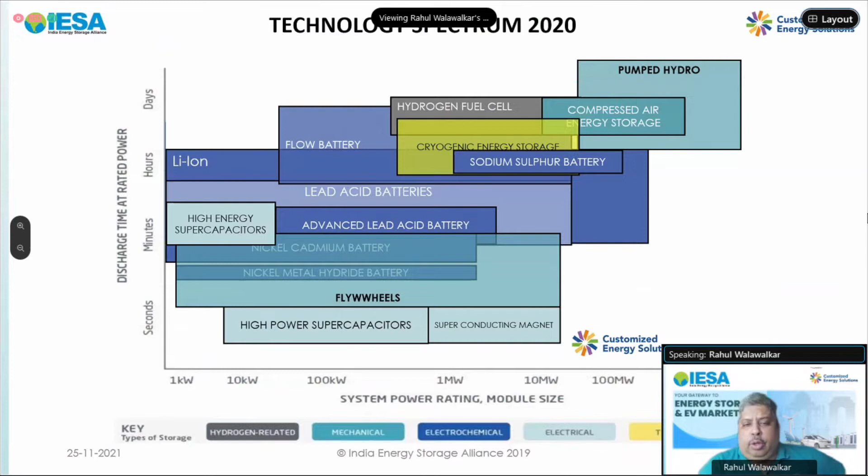So there is a healthy competition across all these technologies, and you need to not just focus on the power and energy or capital cost, which a lot of people get very fixated on. When you are selecting technologies for the right application, there is a range of other parameters such as energy density, power density, thermal safety, round trip efficiency, capital cost, complexity of the management or the controllability of the storage device, the cycle life, which determines ultimately how long you have before you have to replace the technology, and certain aspects such as self-discharge. So these are 7, 8 parameters, and there are many more.

So depending on your applications, you may replace some of these parameters with other parameters, and no one technology is going to be able to perform ideally on all parameters. But it doesn't matter, because for different applications, not all parameters are very important. And that's where it is exciting, where we feel that it's not that the entire market is going to be dominated by just one single technology. We think there are enough opportunities for multiple technologies to play a key role and prosper together.

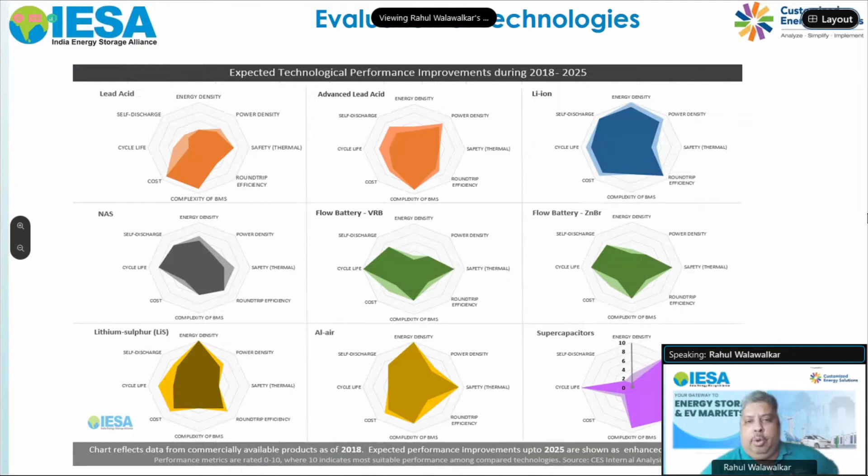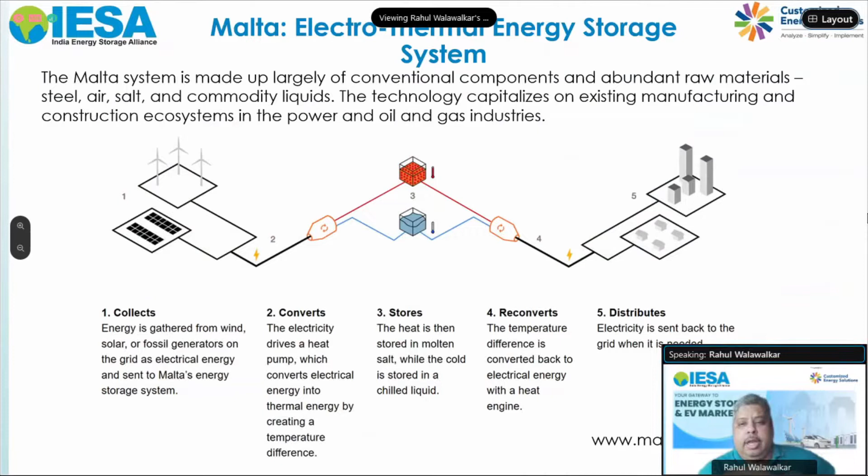Now, coming to alternative technologies, here is one form, which you can call a thermal battery, where you are using excess electricity to convert electricity into heat using a heat pump. And you can store it in a different medium where you can store both hot and coldness. And then you use it for reconverting it back with a heat engine for electricity when you want. So instead of converting electricity in an electrochemical process, you are storing it in a thermal process and then reusing it for generating electricity.

Another approach which is being taken, which builds on the fundamentals of the pumped hydro system, is called gravity storage, where you are stacking cylinders, as in the case of Energy Vault, where you have a crane which is building big towers with various concrete blocks, and you can move the concrete blocks up and down to either store the energy or release the energy.

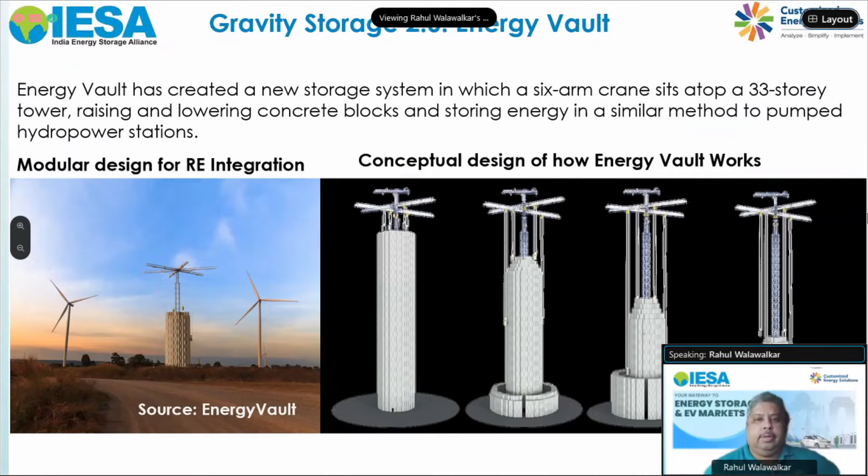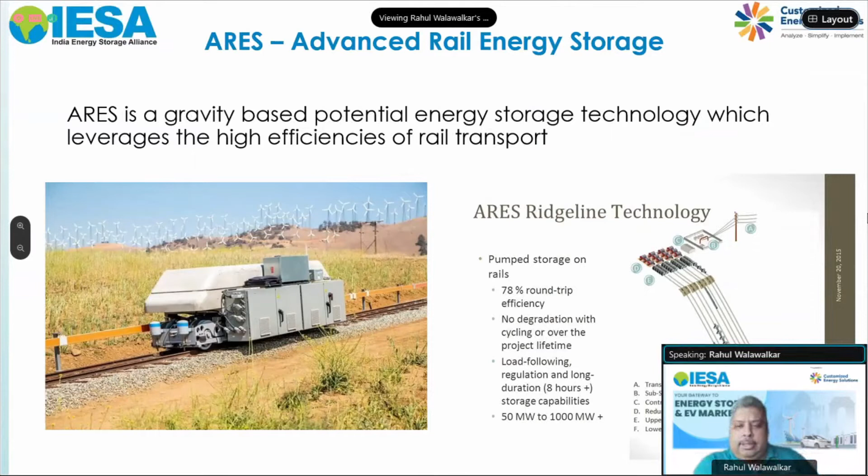There are similar approaches being tried in the US in the form of using rail or a pulley mechanism on a cliff, where you can use similar concepts by moving these concrete blocks up and down using rail technology. So a lot of these approaches are still in early commercialization stage. So we have to wait and see which approaches will succeed. But it's not only for these technologies.

In terms of pumped hydro technologies, the traditional challenge for pumped hydro is to find two geographical locations, one up high on the mountain and one on the ground level, where you need to have both storage facilities of sufficient quantity. But people have looked at using underground pumped hydro, particularly using old mines, where typically metal mines are ideally suited. Some people are even looking at coal or other mines, although I have some concerns, because of contamination or other aspects you need to be very, very careful about.

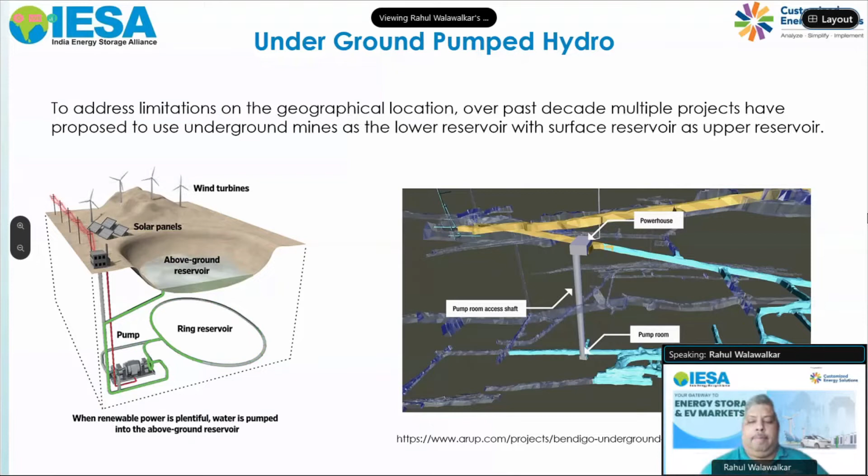But if these are metal mines, then typically those can be very well sealed and there may be fewer issues related to water contamination or other aspects. These are approaches which are being tried, and we'll see if this technology can supplement the traditional pumped hydro technology. There are other forms where, rather than using mines, you can use shafts and you can use weights and or pistons.

And again, I won't get into detail because Robin, I'm sure, will have probably much more information and more accurate information than the graphics I'm using to show. But I just wanted to educate and highlight that there is not just one approach or one technology available.

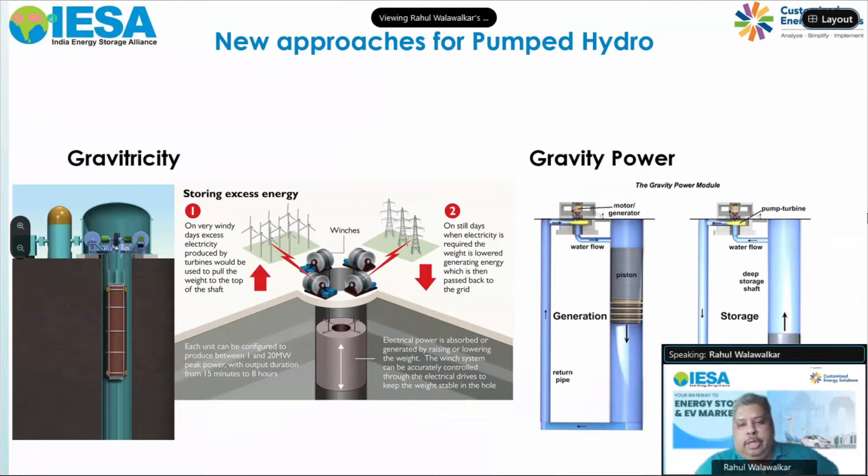I think there are lots of bright minds who are working on a range of technologies which can all meet the challenges which are being generated by our desire to decarbonize the grid, decarbonize the industrial sector. And without energy storage, I think we are not going to get the kind of flexibility we need. So this is really an exciting time.

Now, in terms of looking at energy storage and renewables, one clear aspect is balancing renewables. But this is an area where sometimes I think renewable developers themselves, in a short-sightedness, tried to downplay the importance or need of storage, because for the last decade there was sort of a race to the bottom in terms of looking for the lowest cost renewable energy. And again, when renewable energy was less than 5% or even less than 10% of the grid mix, it did not matter as much.

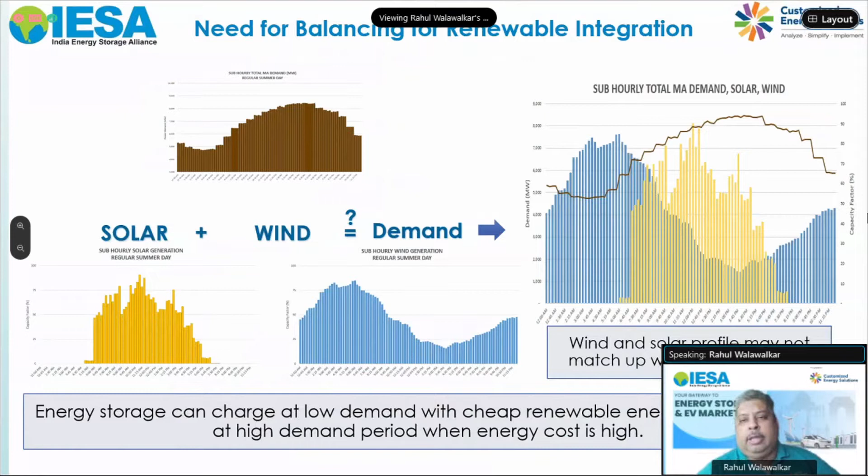But practically, when you're looking at managing the grid on a second by second basis or even 10-minute, 15-minute blocks, you start seeing that there are certain times, particularly morning hours, where both wind and solar will be available. Whereas in the evening time, where typically most grids face the highest peak load, neither sun nor enough wind is available. So just adding wind and solar is not going to allow us to run the world with net zero energy.

Now, the solution many people think is, oh, but we already have all these existing thermal assets. So why don't we just use thermal assets wherever wind or sun is not available? And technically, they are absolutely right. You can very well do that. But then the question is, why are we adding all these renewables? If the goal is the environmental goal and not just looking at the cheapest energy source, then mixing renewables and thermal makes no sense.

And there are many studies which have been done over the last decade around the globe which show that, especially if you are trying to rely on coal, maybe gas is a better solution. But unfortunately, in places like India, gas is almost non-existent. So you are looking at mainly thermal power in terms of coal energy for balancing renewables.

And that makes no sense because when you're operating these thermal assets in a part load condition, particularly going below 50% PLF, you start getting a situation where you lose a significant amount in terms of SOx and NOx emissions. And especially in India, where some of the particulate emission control and other mechanisms are not yet enforced, I think we are getting into a nightmarish situation where India already has the distinction of hosting 19 out of the 20 most polluted cities.

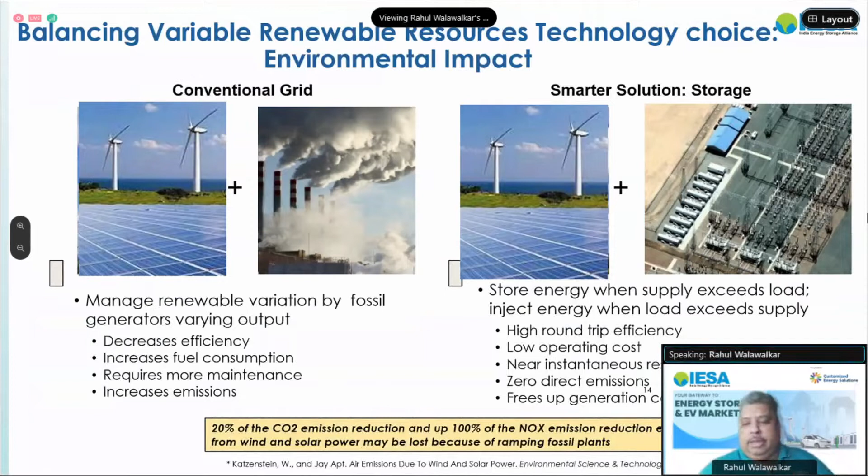So we cannot afford to rely on these thermal assets for this. And a better solution is already available in terms of integrating storage with these renewables, where you can have higher round trip efficiency, you can have much lower operating cost, and the levelized cost of renewables plus storage is coming down so rapidly that it can easily displace any peaker unit, but possibly even intermediate and baseload units in the coming decade. So here are some of the price data for storage.

And one thing people need to realize is that it is not just one parameter. You are not just looking for the cheapest energy storage technology, but there are many parameters such as your charge discharge rate, round trip efficiency, the cycle life, depth of discharge. All those parameters are important to estimate the levelized cost of such a renewable plus storage system. But one thing which is undeniable and very clear is that the cost is coming down, and it is already becoming a very good option especially for commercial and industrial customers who are paying much higher tariffs, especially in India, as compared to some of the other segments.

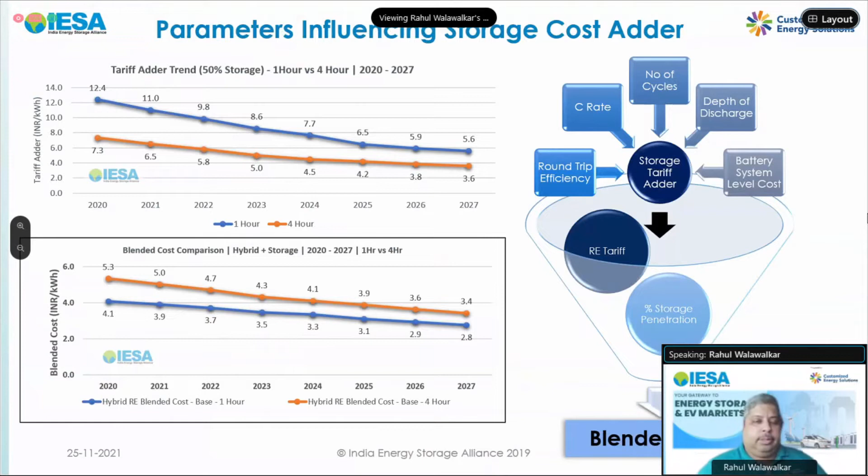So we as CES have been working on these types of projects for more than a decade now. We have worked on more than 200 projects on sizing storage and renewables. Using that, we have developed this platform called Comets, which can be used for evaluating which technology to use, how to size the technology, how to plan for any replacements if required, or how to evaluate two different technologies where one may have, say, 25 or 30 years of life, as in the case of pumped hydro or other mechanical systems, and another with 5 or 7 year life with multiple replacement cycles. So these types of tools can be used to make sure that you make the right investment decision.

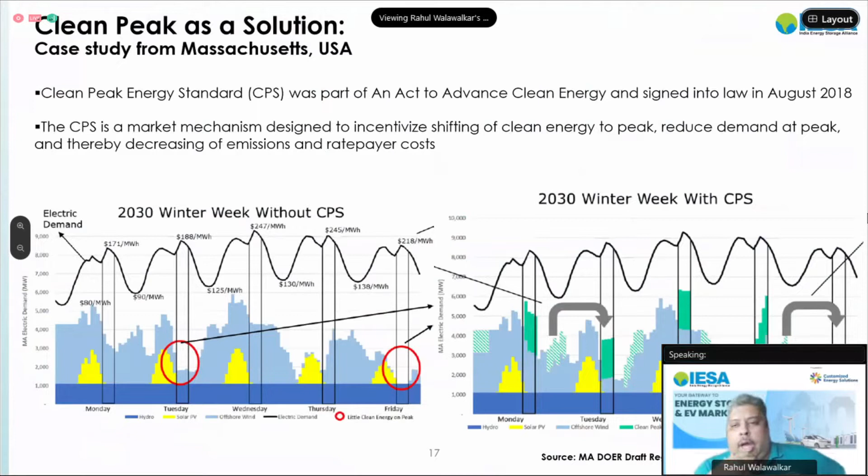The other area where storage is now being seen as an important asset is for cleaning up the peak. This is work which we did for the state of Massachusetts in the US, where we did a system level analysis and demonstrated that with more renewables coming in, the overall grid is getting cleaner. But still, because of reliance on traditional fossil fuel resources, the peak period was the dirtiest period. Based on that, a clean peak standard was passed, creating incentives for using storage and other technologies to reduce the carbon intensity and emissions during the peak time period. So those types of approaches also need to be tried. And especially if you're looking at a 4 to 6 hour peak, then RE plus storage is already a great solution.

Now, there has been a lot of policy work happening over the years in this area. As I mentioned earlier, IESA was launched in 2012. Since then, we have been part of various government committees, and we have been pushing for step-by-step improvements in removing barriers and enabling markets. So in India, hybrid projects are already considered renewable projects. There is an RE plus storage hybrid policy already released by MNRE, and it is approved by the Central Electricity Regulatory Commission. Such hybrid projects can be done as greenfield projects, or you can look at an existing wind or solar project, add storage and make it a hybrid project.

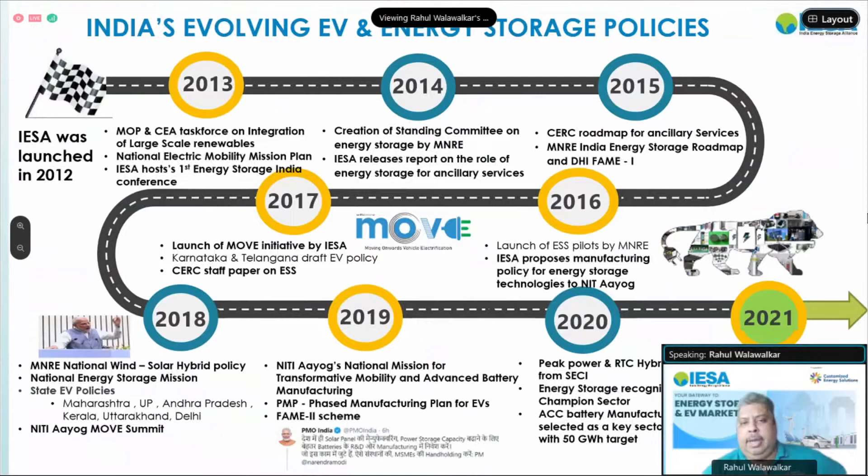We have a National Energy Storage Mission, which has been drafted by MNRE, and that is now integrated with the National Mission for Transformative Mobility by NITI Aayog. Together it has created a huge opportunity for setting up manufacturing in India. Over the last year, the Ministry of New and Renewable Energy and NITI Aayog have also been working on the National Hydrogen Mission. And we feel that green hydrogen will actually create more opportunities for deployment of both renewables and storage, rather than being a competition with existing storage technologies.

So overall, even without considering some of the recent announcements made at COP26, these are the results from our annual report. I am showing here market projections from last year's report, where as a base case, we are considering somewhere around 400 to 500 gigawatt hours of energy storage deployment across stationary and e-mobility.

And in a best case scenario, this demand can be more than 700 gigawatt hour between 2020 to 2027. And we are right now updating this and coming up with a scenario for going through 2030. But if anyone is interested in these reports, you can drop me a mail separately, and I'll be happy to connect you with my colleagues who have authored these reports.

I mentioned earlier that one of the reasons why the prices are coming down is also the scaling up of manufacturing. And this is the area where IESA since 2016 has been working on creating a policy framework for enabling advanced manufacturing in India. And as part of that, already there is a mission launched for battery technologies, but we hope that in the coming years, other technologies, if they decide to set up manufacturing in India, we as IESA as well as many government agencies will be willing to support those technologies as well.

But for batteries, already there is a 50 gigawatt hour battery manufacturing mission, which is announced, where the cabinet approval came in May earlier this year. By October, the actual RFP was released, and the current deadline for submitting the bids is end of December, but it may get extended by a month based on some of the requests from many of the leading companies. But by March, this selection process should be over. And between June 22 to June 24, these gigafactories will start getting constructed.

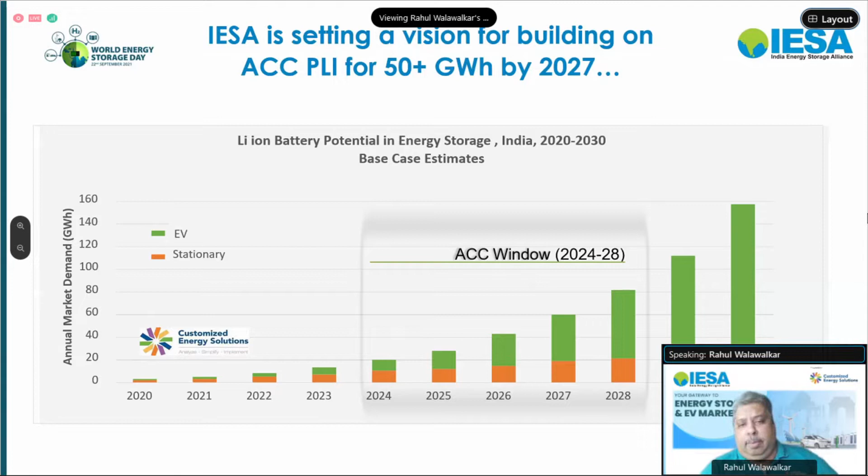So we want to make sure that we don't just stop at building 50 gigawatt hour of battery technologies, but look at all forms of technologies and support those technologies to get to more than 100 gigawatt hour manufacturing by 2030. And we want to continue to build on that to get to 500 gigawatt hour manufacturing capability by 2035.

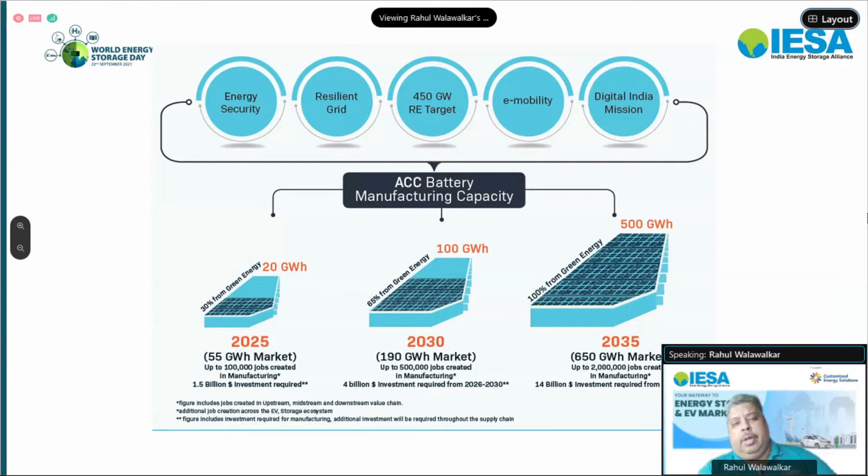We are looking at supporting various startups already under IESA. We have more than 25 startup members, and we have partnerships with many government ministries as well as other private incubators where we are together supporting it. Next year in February, we are launching an accelerator program where we ourselves will be taking an active role in grooming some of the next generation startups.

We are also addressing the skill development gap related to this emerging area, because right now the kind of interest and opportunities which are coming up, it is not matched by the skill development. Many of the existing universities and programs are not capable, or they are not right now equipped for providing the right kind of training for this. So we are looking at partnering with many other associations or even academic institutions for addressing that skill gap.

We also have created our own magazine, Emerging Technology News, for creating awareness. There are various knowledge papers which are released throughout the year. There is a podcast available for free for people who want to stay informed about these opportunities. And there are also commercial reports available in terms of either market overview reports or technology assessment reports, which can be purchased or which can be included with a higher level membership of IESA.

So to conclude, I would say that over the last 5 years, the energy storage and e-mobility policies have evolved quite rapidly in India. Overall, the energy storage sector has shown a similar learning curve for cost reduction as exhibited by the solar industry. There are a range of technologies where performance improvement is happening, cost reduction is happening, and traditional pumped hydro, although it is proven, is limited because of various environmental or geographical limitations. So we need to look beyond just the traditional approaches.

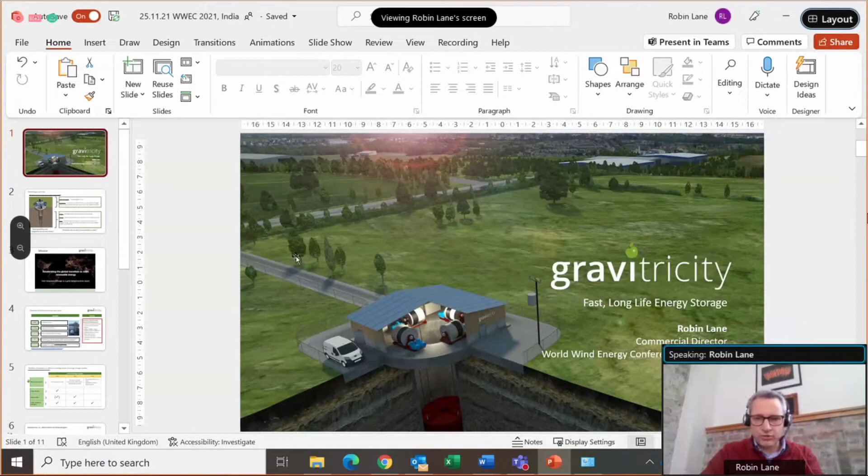Thank you, Rahul. And let's see if we can... Can you see that? For some reason I've gone mute. Can anybody hear me? Rahul, I can't hear you. Can you see that? Rahul, I can see you talking, but I can't hear you. Sorry, I think the organizers were muting me, or we were trying to unmute simultaneously, I guess. Okay. We can see the screen and we can hear you well. So you can see the screen.

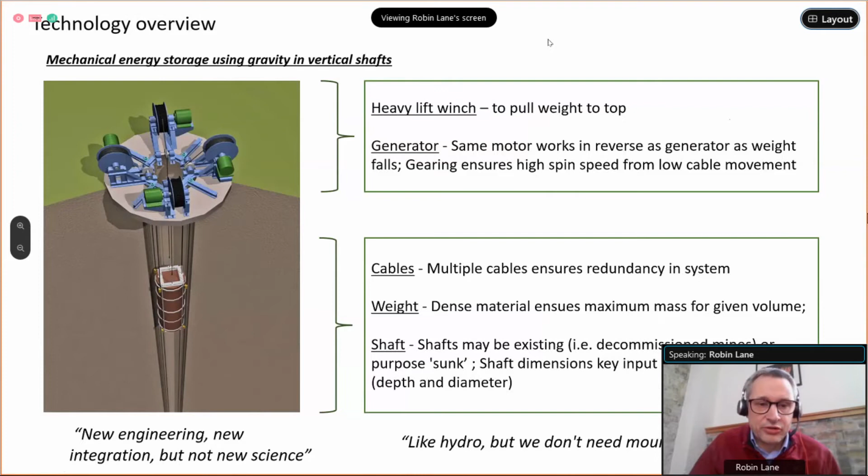In terms of our mission as a company, we see a world of distributed generation requiring a world of distributed storage, and it's very much facilitating the distribution of that storage around the world. The democratization of energy and the low carbon transition. These are all things which are very dear to us as a team, and it is very much a global thing. We're a company based in Scotland, but we feel we have a technology which has applicability in different parts of the world, in the developing world, in the developed world, and in all sorts of different use cases, which we'll get to in a minute. So it's very much a global mission that we have.

But on the equity side, we've raised quite a lot of money as well. We've filed 7 patents in all, and 4 of those have been granted, and 3 of them are still pending, and we're currently looking at filing them elsewhere in the world as well, in different jurisdictions, including India.

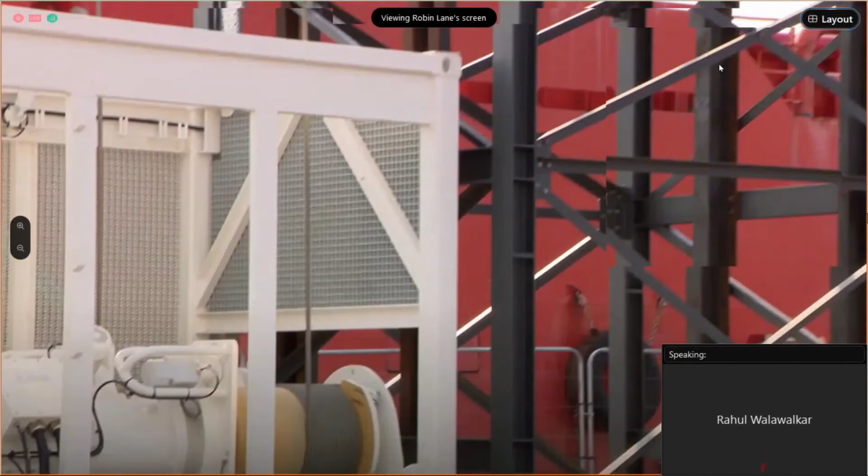Yeah, so there you've got 2 weights going down at the same time. It was quite a modest height. It was only 15 meters high. And so that facility was actually up earlier in the year doing the testing, and we actually wanted to keep it up for the purposes of the recent COP event, which happened just down the road in Glasgow, which is about 30-40 miles away. And we did want to relocate this system to Glasgow, but that didn't prove possible in the end, which was a bit of a shame.

In terms of looking forward, we are looking between 2021 and 2024 to develop our first full-scale deployment, and we're looking at potential sites in Eastern Europe for that, potentially in the Czech Republic or Poland. That will be a 4 megawatt, 1 megawatt hour system, so a relatively short duration system, which will be deployed to provide balancing services and ancillary services to the local grid.

And a key priority for us over the course of 2022 is to raise a second tranche of Series A funding of between 6 and 10 million pounds. So people talk a lot about energy storage and the way the requirements of the market are going to evolve over time. And we have our own perspective on this.

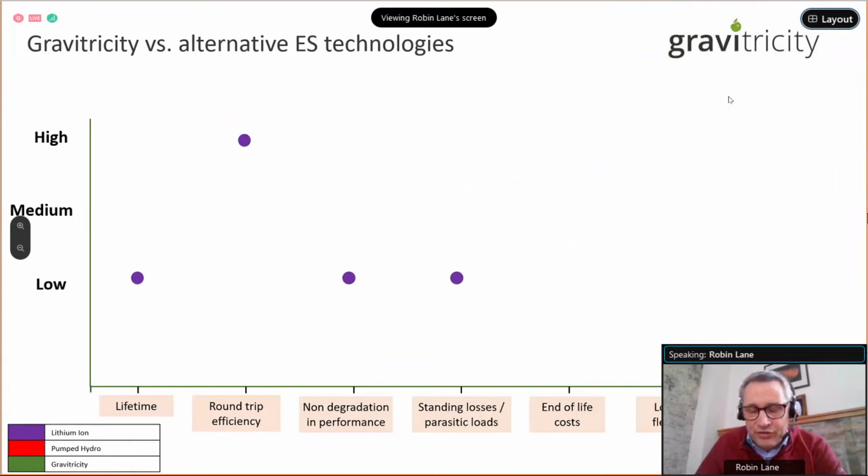It's also not very good on parasitic loads. It requires an air conditioning system to keep it from catching fire often, and so that's obviously a drain on the charge of the system as well. And the other thing that people don't really talk about with lithium ion is the end of life costs. It's sort of an unspoken subject, we feel, on lithium ion,

but it is going to present a problem, and the decommissioning and the challenge of disposing of the technology in an environmentally responsible way is going to create a different category of costs, and that's something which we feel there's not a lot of awareness of right now, but it's going to carry on increasing in importance. They obviously do very well in terms of location flexibility. It's a highly flexible system. It can be located anywhere, and it's also very good on speed of response.

So that's lithium ion. We go through the same thing with pumped hydro. It obviously does very well on lifetime. The components can carry on being replaced, and there's no sort of obvious end of life for them. It doesn't do so well on round trip efficiency. It's sort of 65, 70%, so not nearly as good as lithium ion. And on non-degradation in performance, again, it's very high on that.

Its standing loss is very good. That water can stand at the top of the reservoir or up the mountain as long as you like, and it won't lose any of the potential energy it's got there. And its end of life cost is very good. It falls down a lot on flexibility of location, because you do need certain geographical characteristics to make it work, and it's not so good on speed of response as well. So you can see how pumped hydro and lithium ion are in many respects sort of diametrically opposite. They perform in completely different ways and have different performance characteristics.

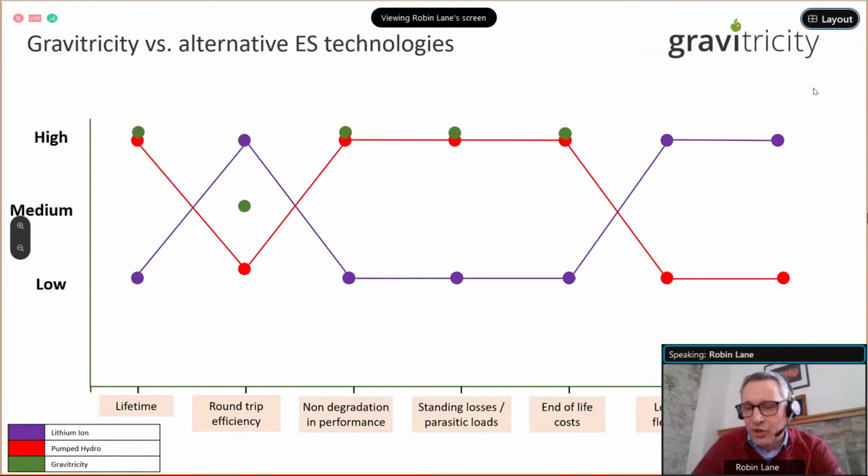Not so good on location flexibility. The nuance there is that when we're looking to locate one of these systems in an existing shaft, we obviously have to go where there is an existing shaft, but where we're looking to locate in a new shaft, we do have a greater level of flexibility. And as I said, we can respond to grid signals in under a second, so we do well on that. So we like to think that we do have characteristics that draw upon some of the best areas of lithium ion and also of pumped hydro.

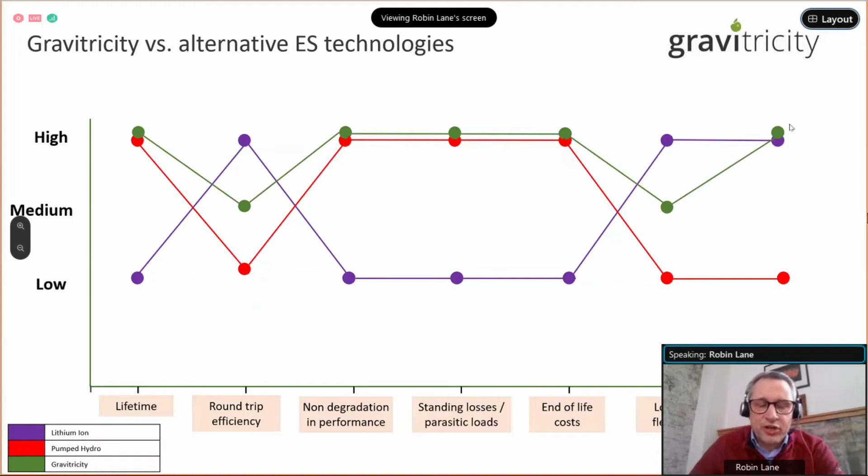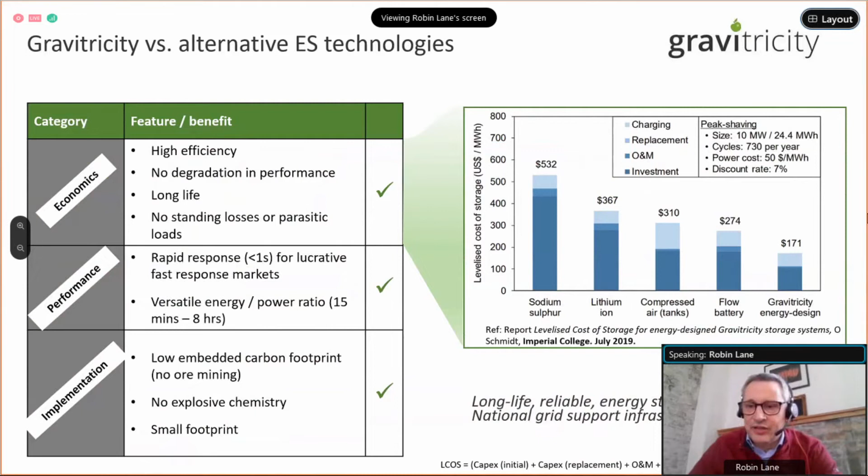And what that equates to, I won't go into the slide in much detail. The stuff on the left is kind of what we've gone through already. But just to say that the graph on the right is a screenshot from one of the reports I mentioned earlier, which demonstrates that our levelized cost of storage over a 25-year period is significantly lower than any of the other technologies that were profiled as part of this study.

We see ourselves operating in 4 different use cases. Balancing service is the one I've alluded to first, and we expect that our initial deployments will be offering ancillary services, grid services, fast frequency response services to the grid. But we see ourselves doing much more than that, and we also see a lot of value for co-locating our facilities with solar.

Supporting industrial decarbonisation, so think large off-grid industrial operations which are looking to wean themselves off their diesel gensets. They could be mines, and there's obviously a fit with what we're looking to do if they do happen to be mine operations, but they don't have to be. They could be any sort of off-grid operations. And fourthly, and very importantly for us, is the combining of our system with mini grids to provide or help to provide more 24/7 power services to remote communities.

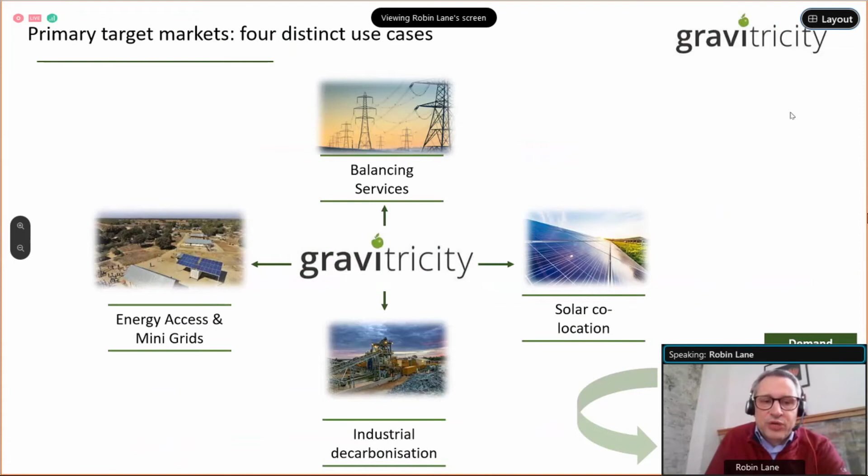I won't spend long on this slide, and we don't need to cover off all the text on the left or on the right, but just to say that we see ourselves as a technology provider to the EPC. So we're down the bottom there. We don't see ourselves as a project developer or getting involved to that extent in particular energy storage projects. We see ourselves as performing a technology provision service to the EPC who's being hired to actually build out the facility. And so we would provide IP licenses, hardware and equipment, and perhaps an O&M contract as well as part of that.

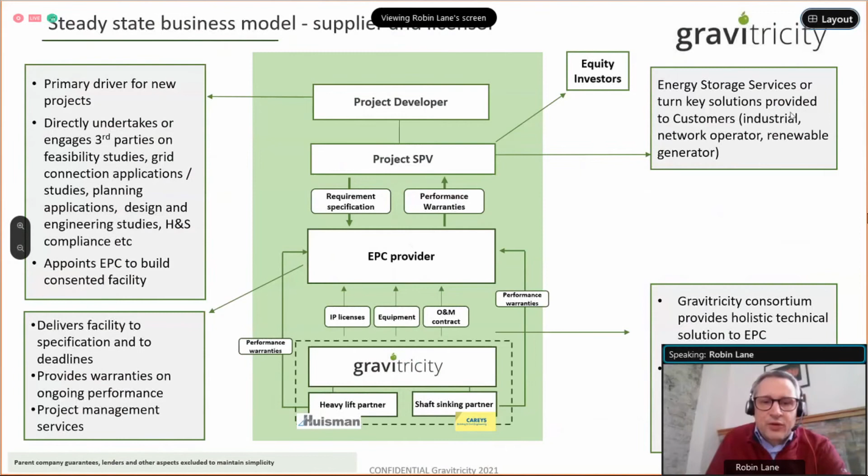And in relation to India, we've recently won some funding to undertake a feasibility study with a consultancy based in India who have knowledge of the Indian market. So that's something which will be kicking off in the next fortnight or so, at the beginning of December. And so that's all I wanted to say. Happy to take any questions either now or at the end of the event.